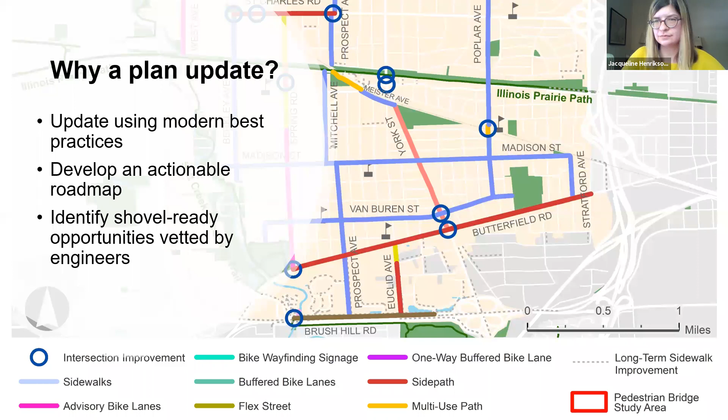All right, and with that, I'm going to turn it over to our partner on the project, Heather Schady. Hi, everyone, and thanks, Jackie. So I'm going to give you a little bit of context for why the city is doing this plan. And also, as Emily mentioned, I'll talk a bit about what we learned in the process so far from the community. So first of all, why a plan update for the city of Elmhurst? Well, there's a lot of reasons. Some of you may remember that the city developed a plan about 10 years ago, specifically focused on bicycle and pedestrian improvements.

This plan is an update to that, and it's looking at new and modern best practices that have changed and evolved a lot since the development of that initial plan. We've learned quite a bit about how to design for people riding bikes, how to design for pedestrians, and also how to make everybody interact more in a better way on the road. And so we're looking at these recommendations from a new context.

As Jackie mentioned, we're also looking to make this an actionable plan. So oftentimes you'll see a plan developed for a community that doesn't get a lot of traction. And we are attempting to not do that with this project by developing recommendations that have been vetted by the community and are supported by them, and also making sure that they're consistent with modern standards, best practices, and ready to be either funded locally or get federal funding to build and design them.

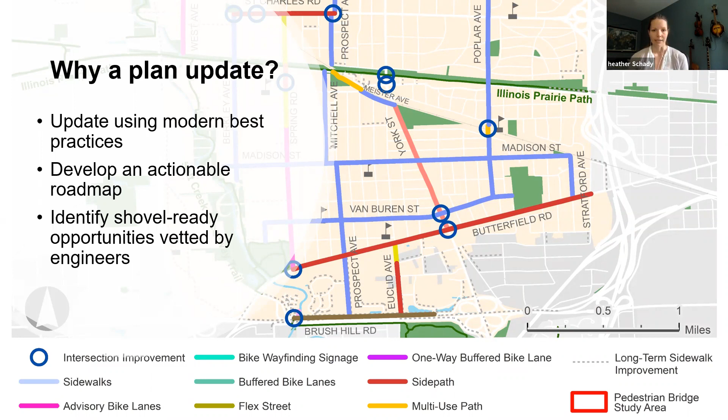So also we want to point out that having a transportation plan that's focused on walking and biking is really something that can support everyone in the community. As Jackie mentioned earlier, we're focused on creating ideas and recommendations that support all users of the road, regardless of their age or ability. And our focus is really thinking about how people who are dependent on non-car travel get around, and make sure that there are options for them available and that they're comfortable, low stress, and accessible.

In any given community, there's about 30% of people who don't drive, either because they're too young to have a license, they've aged out of driving, they have a disability that prevents them from operating a car, or they just can't afford to have a car. And so we know that these people need services and need the ability to get around their communities. And sometimes that means creating walking, biking, and transit-friendly places to help get them around.

Next slide. So while the focus is on perhaps the more vulnerable users of the population, having a community that supports walking and biking is good for everyone, regardless of how you get around. You've probably noticed that traffic congestion has improved quite a bit over the past few months with the stay-at-home order, and you've probably noticed changes to the way you feel about walking around or riding your bike because of that. So if we think about in the long term, creating a community that really supports less traffic and more forms of transportation, you might see those benefits long term.

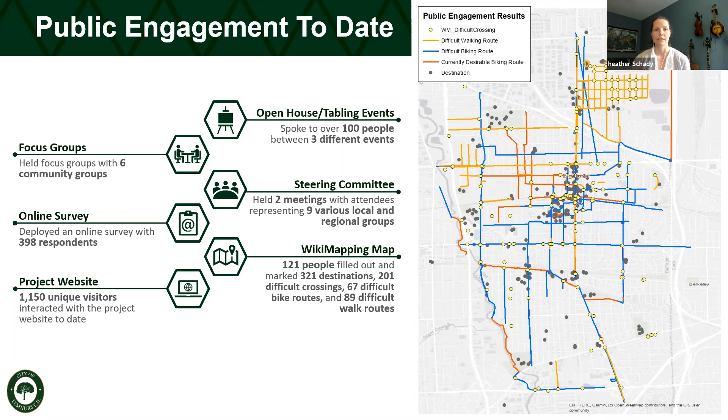So when we surveyed residents, we asked some questions just to get a sense of what people's priorities and concerns are. And one of the questions in our survey asked people to respond to the question, what are the top factors that influence your decision to walk or bike somewhere? So for walking, our survey respondents overwhelmingly told us that shoveled sidewalks and snowy conditions were something that they really thought about if they were choosing to walk or not.

Presence of sidewalks was another high factor. 86% of the survey respondents told us that they would walk if there were sidewalks and would not if there weren't. Ease of crossing at intersections, 77% of the survey respondents told us that that was a primary concern for them. So if it was difficult to cross the street, they probably would choose a different mode of transportation.

Presence of trails or paths, 66% of people told us that. We had a lot of people responding to the survey that they don't necessarily walk for transportation, but walk for recreation. So recreational trails are a big component of that for them. And then the fifth highest factor that people told us about was speed of traffic along their route. So if cars are traveling faster, they may not feel as comfortable to walk somewhere and will choose a different mode.

For cyclists, distance was a large factor. So 100% of respondents told us that if it was too far away, they weren't going to ride their bike to a location. Same with interactions with drivers. So if they had a more comfortable or less comfortable experience on the road with different users, they may or may not ride as a result.

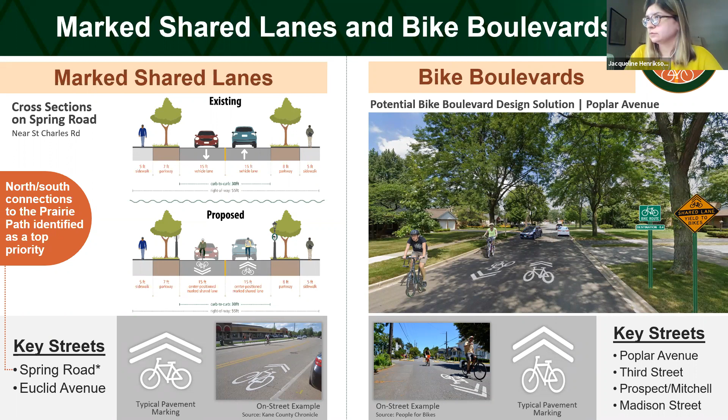All right, and now we are going to go to another anonymous poll. And we will give everyone about 20 to 30 seconds for answering the question. All right, let's give everyone about, oh, poll closed.

All right. So it looks like if these proposals were made, 67% of people would be more likely to bike in Elmhurst, 29% unsure, 4% or 5% no. And then how comfortable, it looks like 43% would be somewhat, 29% very comfortable, 19% somewhat uncomfortable, 10% neutral.

All right. So next, we will discuss advisory bike lanes and bike lanes. And these are very similar treatments. So you can see the conventional bike lanes on the right and the advisory bike lanes on the left. And the difference is really width. So advisory bike lanes tend to be on streets that don't have quite enough width for the conventional bike lanes. So in most instances, cars and cyclists can be in their separated lanes.

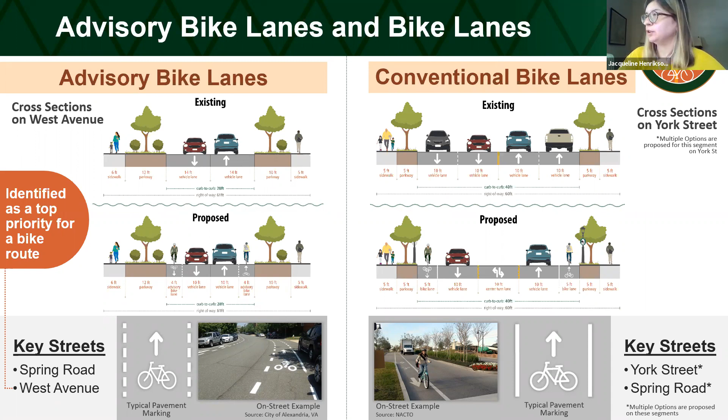All right, and we have another poll. And we'll give everyone about 20 seconds to answer the questions.

All right, so it looks like 65% would be more likely to bike in Elmhurst if they were implemented, 10% no, 25% uncertain. How comfortable would you feel biking on bike lanes? 45% very comfortable, 25% somewhat comfortable, 20% somewhat uncomfortable, and 10% neutral.

All right, and to move forward, so these recommendations, buffered bike lanes and protected bike lanes, these would also still be on street, on pavement recommendations. So the differences here is that these are very similar to bike lanes, but it is providing a bit more width for the bike lanes. So there would be a buffer. The buffer could either be on the outside, just to give more separation between the bicyclists and traffic, or it could be on the inside. A good example of that would be on a road where there's a lot of parking, so to keep the cyclists out of the parking door zone.

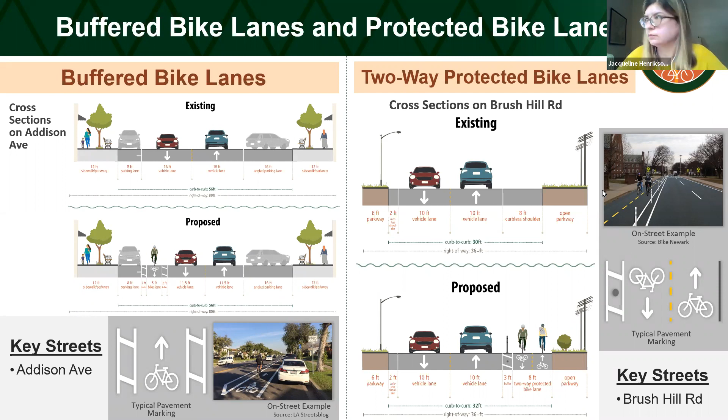And we have another poll. Oh, sorry, went too fast. Okay, we'll give everyone about 5 more seconds to respond. All right, so about 76% would be more likely to bike in Elmhurst, and 67% would be very comfortable with these facility types.

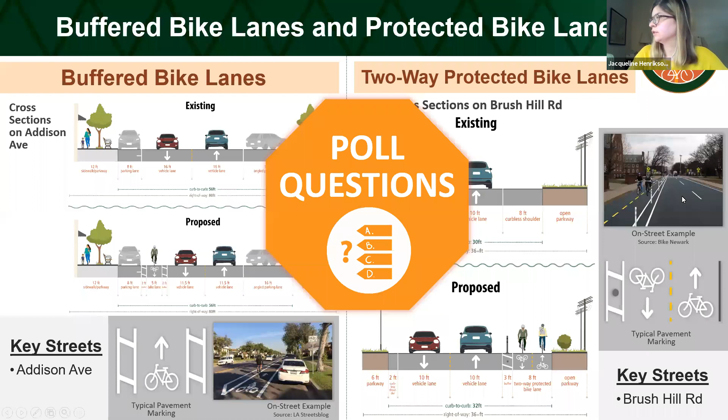All right, and finally, the most intensive bike facility type recommendations that we're proposing are side paths and multi-use trails. And something to note for these is that they can, of course, also be used by pedestrians. So a side path is very similar to a trail, but it goes alongside, in most instances, a major roadway. So it'd be similar to a sidewalk, but a lot wider so that way both pedestrians and bicyclists could use the space. And then multi-use trails. So Elmhurst already has a lot of great regional trails in the community, such as the Salt Creek Trail and the Prairie Path. So in some instances, we're recommending adding in more trails as well.

And then these would often be, and actually the whole bike route network would be accompanied with wayfinding signage. And this would show cyclists where they should go, where they should turn to reach different destinations, and the distance that it would take to get there. And that's really helpful for people who aren't as familiar with the safe roads to bike on in the community.

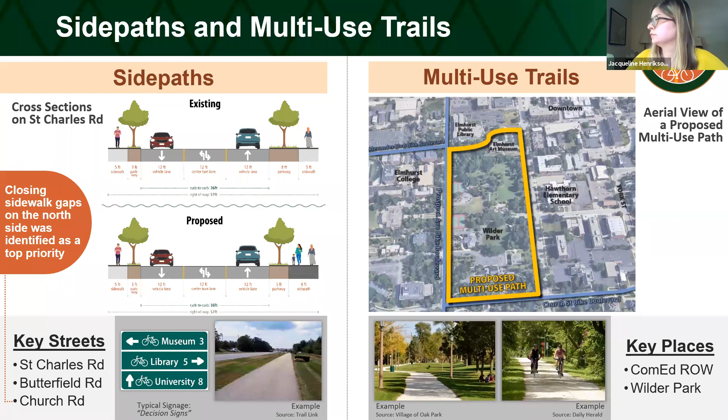And we have another poll. All right, and I think we can shut the poll down. All right, so 81% would be more likely to bike in Elmhurst, 52% very comfortable, 33% somewhat comfortable.

All right, and so we also have some roads in Elmhurst in which we found from community engagement from the first round and from overall connectivity that it makes sense that these roads are bike routes. But at this point, more information, more study would be needed to determine the best alternative to carry forward. So we provided at this stage a few different options, and Spring Road, as we mentioned earlier, we've already received a lot of great feedback on this one.

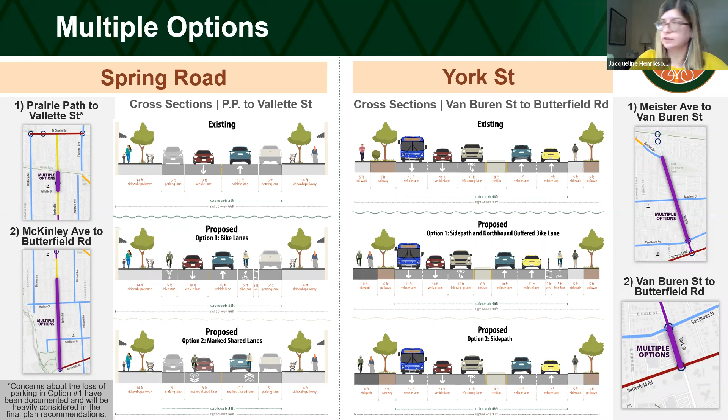And now I will turn it over to my colleague, John, to go over the rest of the recommendations. Hello, I'm John.

Here is our pedestrian improvement toolbox. So the first one in the upper left, raised crosswalks. So this is kind of like a speed hump, but it has a crosswalk in the middle of it. So the crossing itself is flush. So it draws attention of motorists to the crosswalk, sort of forces them to pay attention to it and makes pedestrians a little safer. Another is a rectangular rapid flashing beacon, or an RRFB. These are button controlled crossings with excellent signage that draws attention to the roadway.

Pedestrian medians in the lower left are essentially a pedestrian island, and you can cross the road in 2 phases if people aren't obeying the signage. It also prevents people from cutting the corner as a motorist when they're driving, so it keeps them from illegally entering the lane for oncoming traffic, which is very common when people are trying to cross.

The high visibility crosswalk that we recommend is the continental style crosswalk, which we've determined to be the most visible type, and that is because the longest axis of the road paint is most visible to the motorist. So it's moving in the same direction that they are.

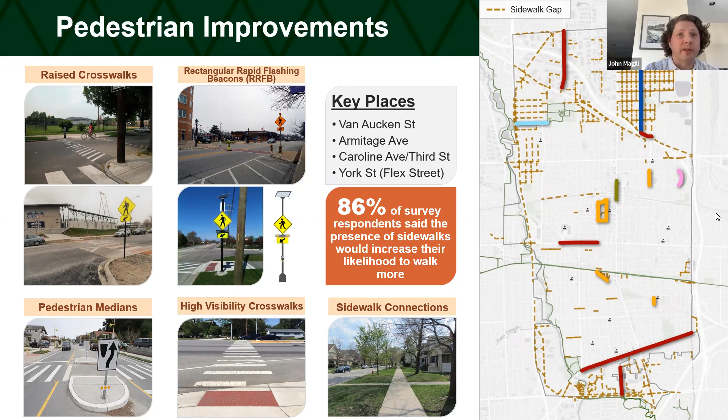And we also have some key places that we're proposing, including Van Auken Street, Armitage Avenue, Caroline Avenue into 3rd Street, and York Street, which we're proposing as a flex street, which I'll touch on in a moment. Next slide, please. Or poll, sorry.

Here are the poll results. If the proposed pedestrian improvements were implemented, would you be more likely to walk in Elmhurst? 71% say yes, 14% say no. Rate the importance of sidewalk improvements to Elmhurst transportation system. 67% feel it's very important, 19% somewhat important, and 5% very unimportant.

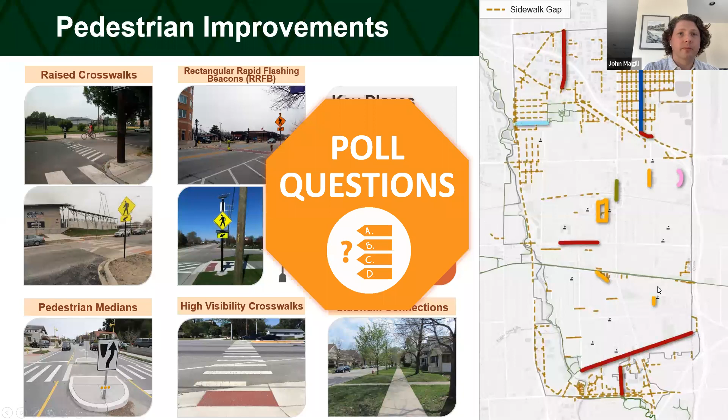Here is our toolkit for intersection improvements. One is curb extensions. This bumps out the curb a bit near the crossing to shorten the distance that people have to cross. The shorter the crossing, the safer the crossing is. Also, by including a curb, it forces motorists to pay attention.

An additional strategy is wayfinding signage. These are very useful if you're on your bike and maybe you don't ride your bike every day, not terribly often. You can be out for a bike ride and you can see this signage and it can direct you where you need to go.

Another strategy is bike boxes. Bike boxes, as shown in this example, can connect to a bike lane. Typically they're in the specific shade of green paint, which is associated with bike paths, and this puts you in front of cars. It's very common when cars are turning right and a cyclist is going straight that the cyclist and the car will collide. It's a very common type of bicycle accident. And so by putting bicyclists out in front of the cars when they're stopped at a light, it enhances their visibility.

Another is mini traffic circles. This simplifies a complex intersection by making everyone go in the same direction. And you can see that in this example, the curb is flush. And one of the reasons for this is that it doesn't prevent emergency vehicles from being able to access the road around it.

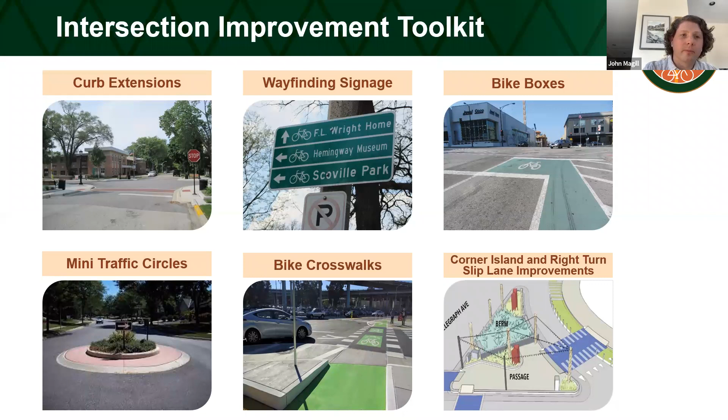And here we see the York Flex Street existing on the left and proposed on the right. An important takeaway for this is that we are not proposing to remove parking, and cars will still be able to access the road. We call it a flex street because it's a flexible space that can be altered to fit the needs of the users in the moment.

So we use some placemaking elements such as festoon lighting. They're very lively, very fun. Additionally, lighting at night improves safety. It makes people feel more comfortable. It also designates the space as a special place that you can seek out as a destination. The Gateway Arch, which we're showing here at City Centre Plaza, designates the area as a very special place. It's a destination where you head to do fun things.

We're proposing decorative crosswalks. These dress up the downtown a bit while also enhancing safety. And for the flexible street design, we're proposing pavers across the roadway. Pavers across the roadway do a few things. One is that they make it a little bit more formal. It sort of has an old world aesthetic. It's a little more elegant. Additionally, when people are driving on pavers, usually they slow down a little bit. It also marks a transition and forces drivers to pay attention.

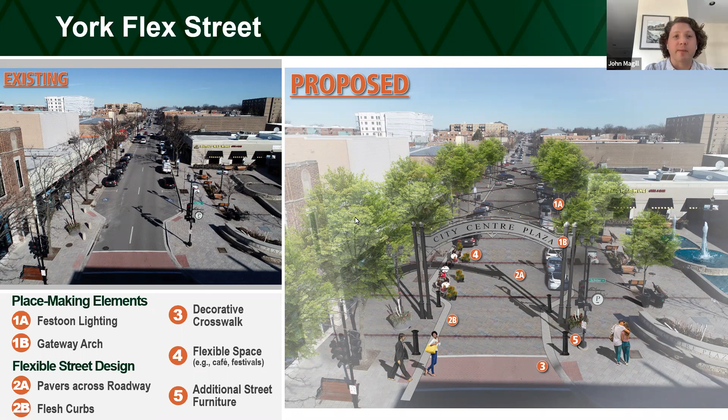And now we have a poll. Do you see the Flex Street having a positive contribution to Elmhurst's downtown? 75% say yes, and 5% say no.

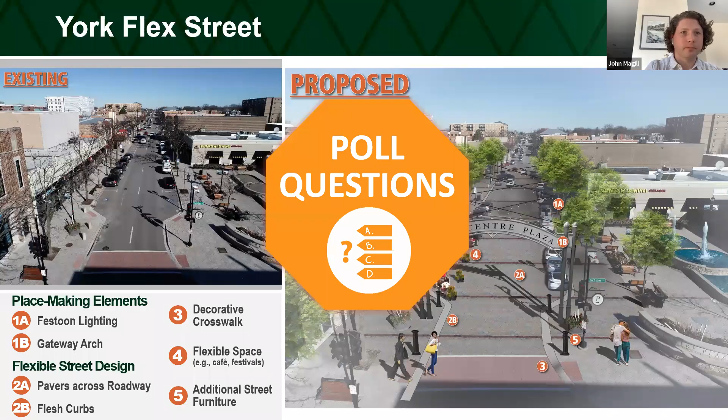So an additional thing that was identified as difficult in our community outreach was connections to trails. On the left, you can see Salt Creek Trail and Brush Hill Road. Currently, if you are riding your bike on Brush Hill Road and you need to access the trail, there's a cut through in the housing there, which isn't necessarily great for everyone, including the housing development itself. So we're proposing a switchback. If we could see the rendering for that.

So this rendering shows a switchback that transitions down from the roadway to the trail, and you can see at the top there the green bike lane on one side and the pedestrian lane on the other. This communicates to people that they're about to enter a shared space, and the switchback itself helps to slow down cyclists, especially as they enter the Salt Creek Trail at such a sharp angle. So it helps to slow everybody down, keep everyone safe while providing excellent access to the trail.

And then on the right, currently there is an RRFB type crossing at Prairie Path and York, but a lot of people don't feel very safe on it.

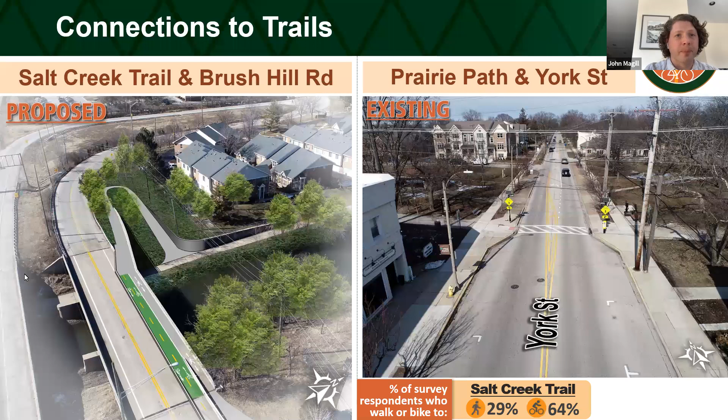And one of the complaints is for motorists that cyclists are entering the crosswalk too quickly, and that cyclists and pedestrians don't necessarily feel safe crossing there. Motorists are moving along pretty quick. So we're proposing in our rendering to transform the space; we have two options for this. Alternative A is a little bit more restrained.

We want to put bicycle stop signs in the Prairie Path itself and additional signage near the stop bar while bumping the stop bars back a pretty appreciable distance from the crossing itself. The crossing itself would be flush and made of concrete, and the concrete is a different color, texture, material than the pavers which are around it, and the pavers lift up to make the crossing flush. The pavers help to draw attention to the space with their color, while at the same time their texture helps to slow down motorists.

And then in our second option, I forgot to mention on alternative A in the Prairie Path, we're proposing a chicane impediment in the pathway there. So it's a fence with signage on it, and it forces you to meander around the fence, and it forces you to slow down and pay attention so that you're more safe as you enter the crosswalk. And then, sorry, alternative B.

Excellent, thank you. And John, do you mind if I interrupt? Yeah, please do.

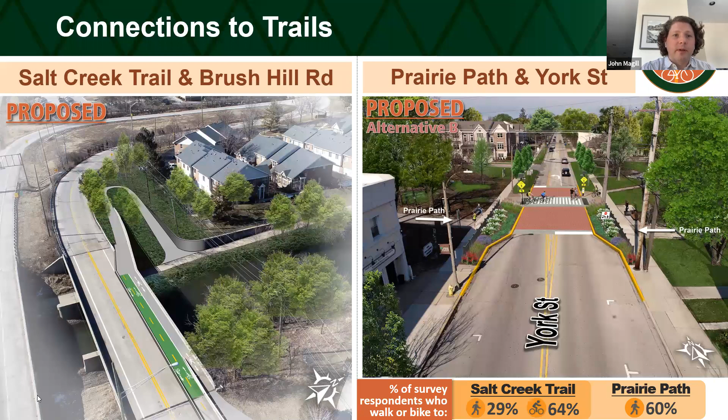Oh, sorry, we have a poll. Do you see the proposed trail connections encouraging people to use the trails? 72% say yes. 6% say no. Do you see the proposed trail connections improving trail safety? 78% say yes. 6% say no.

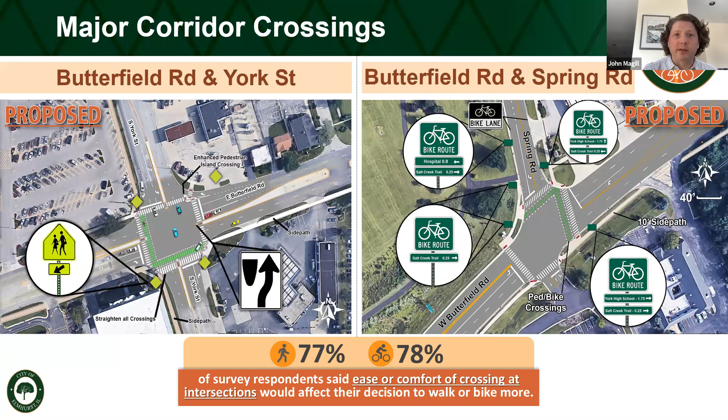This has the same dedicated bicycle crossing, which draws attention of motorists to bicycles in the roadway, while providing ADA accessible access at all 4 legs and additional crossings of the continental style. And now we have a poll. Do you see the proposed major crossing improvements encouraging people to walk and bike?

65% feel yes, 12% feel no. Do you see the proposed major crossing improvements improving safety for pedestrians and cyclists? 82% say yes, and 6% say no.

St. Charles Road and Berkley Avenue is one of the school crossings of major roads that we identified as a problematic area in our community outreach. So we're proposing to alter the crossing to add an additional crosswalk at the leg of the intersection that's farthest from the camera in this case, and improve the crossing condition at all 3 legs with continental style crossings.

Additionally, on St. Charles Road, we're proposing a median island, which would turn the crossing into a 2-step crossing if traffic was real heavy, while protecting pedestrians with bollards. These bollards could match the bollards that are existing at the track across the street.

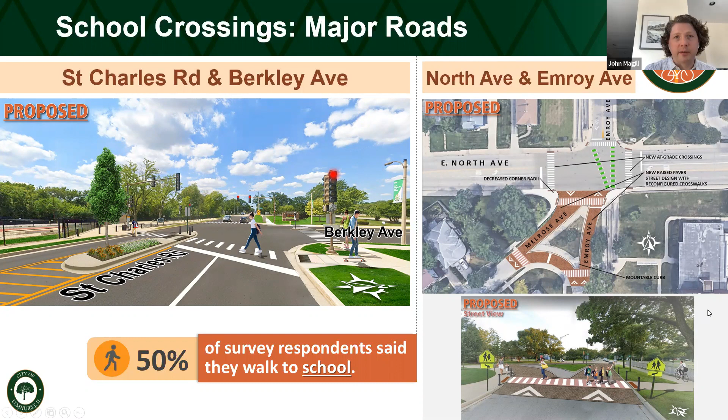Additionally, we're proposing new at-grade crossings for East North Avenue itself, and decreasing the corner radii, which forces cars which are turning to pay greater attention as they are turning, which hopefully improves the visibility of pedestrians. Additionally, on East North Avenue, we're proposing bike crossings, which would be dedicated crosswalks just for cyclists.

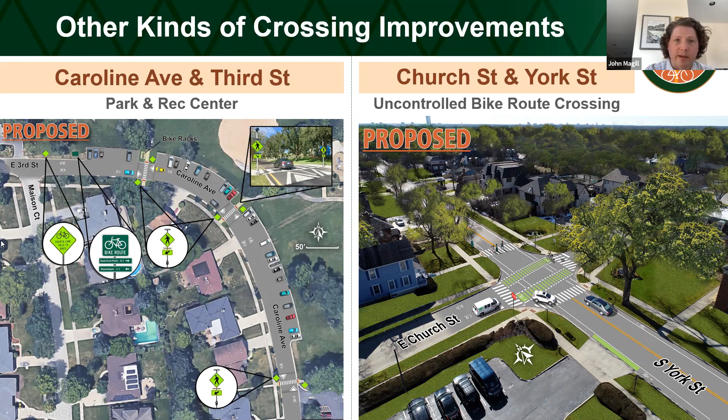At Church Street and York Street, we're proposing some bike and pedestrian friendly changes, such as bike boxes. If you're on East Church Street and you are crossing onto South York Street, there are bike boxes for you to make your turn more safely. I talked a bit about bike boxes earlier, so that's one of the amenities here.

Additionally, East Church Street becomes a bike boulevard. You can see there's some green road paint at intersections that cross the bike path, which is proposed for South York Street. The lane would constrict a bit, but it would still be comfortable to drive in. Additionally, there are dedicated bike crosswalks.

If the proposed improvements that we presented so far were made, would you be more likely to walk about? Looks like we weren't getting feedback on that one, so I think we'll just move on.

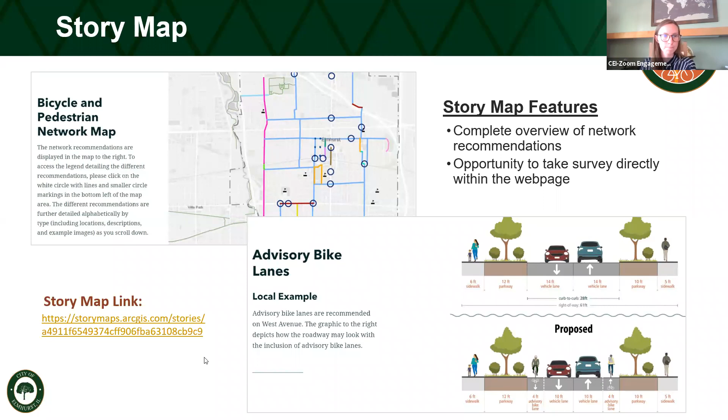Now to look at some next steps. As we've mentioned, please view that story map. It'll give you more details on the different recommendations we're proposing. We also encourage you to take the online survey; that's a way for us to collect feedback to make changes to our recommendations in the final plan. Any questions that weren't addressed will be posted to the project website. As always, please contact us if you have any questions, and please help spread the word if you can.

Now we'll move into the Q&A portion. A lot of the questions were being answered live, so hopefully we were able to give some good answers there. There are still some outstanding questions. One is an anonymous question: will actual pedestrian and biker volumes drive prioritization in our recommendations, along with community feedback? Jackie, do you want to take a stab at answering that?

Yeah, I'll take a stab at that one. Thanks, Josie. As part of this study, we won't be collecting pedestrian or bike volumes for every recommendation. But that could potentially be considered for corridors where we're recommending more study to determine the best route moving forward. Multiple options could be one example, or if there are specific target locations, we could potentially look into that for this study, but that will be determined after we gain this feedback, look closer, and see what needs to be discovered further.